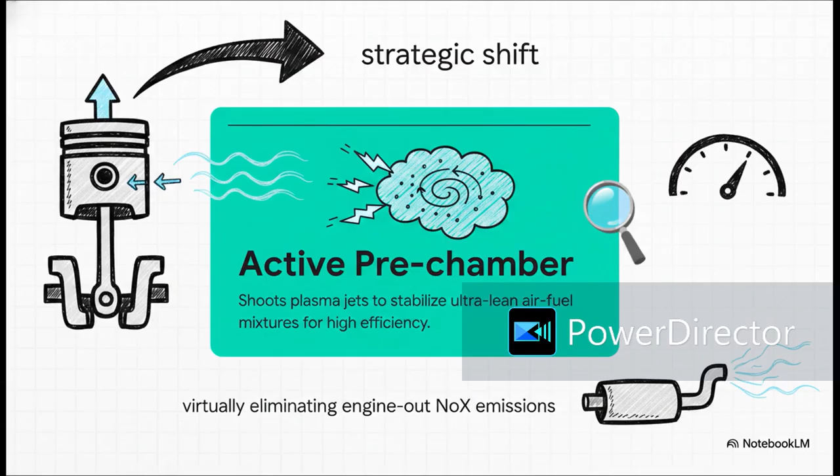Engineers are combining an active pre-chamber to shoot plasma jets into an ultra-lean air-fuel mixture. We're talking about running at a lambda of 2.0 with an aggressively boosted Miller cycle. By doing this, they are breaking through previous physical limits of heat loss. They're getting stable combustion where previously you'd literally just get misfires, dramatically boosting thermal efficiency and virtually eliminating engine-out NOx emissions. It's brilliant.

And the WCX data shows just how diverse this thermodynamic renaissance really is. These aren't one-size-fits-all solutions. They are deeply tailored to specific platforms. We're seeing everything from ultra-lean 2-liter passenger car concepts all the way up to massive machine learning-optimized open bowls for heavy-duty diesels. The engineering toolbox has literally never been this vast.

Tracking these thermodynamic performance metrics is fascinating. We see Tongji University's 2-liter ultra-lean breakthrough yielding over 50% efficiency. There's a hydrogen Carnot opposed piston engine hitting a staggering 58.7% thermal efficiency. But I really want to zoom in on this 11.6-liter heavy-duty gasoline concept from IAV because the commercial implications of this specific architecture are absolutely massive.

So to meet upcoming EPA 2027 regulations, Class 8 heavy-duty diesel engines are going to require incredibly complex, bulky, and wildly expensive after-treatment systems. Think dual-dosing SCRs and massive diesel particulate filters. It's a total capital trap for OEMs. But IAV bypassed this entirely.

By adopting a sky-high 16.3-to-1 geometric compression ratio combined with stoichiometric exhaust gas recirculation, they engineered a heavy-duty engine that actually runs on gasoline. Because it runs at stoichiometry, it can use a simple, cheap, tightly coupled three-way catalyst to control emissions. It completely sidesteps the massive capital costs of diesel aftertreatment.

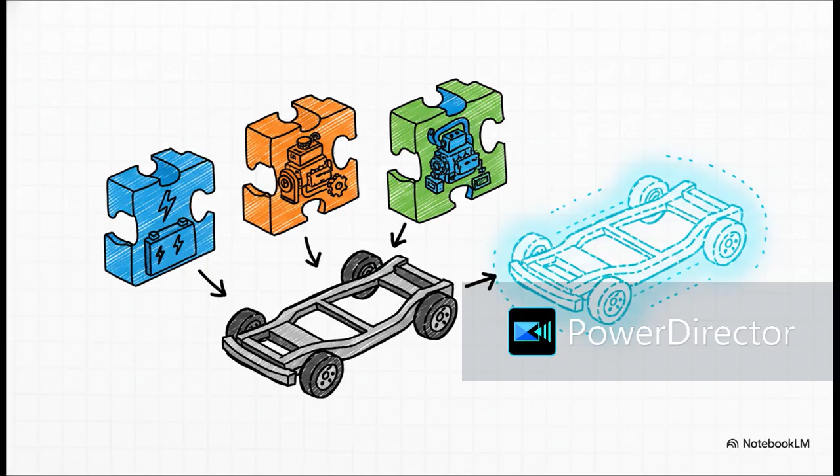You need to master digital twin simulation because managing the thermals and power flow of these multi-energy platforms is incredibly complex. And above all, you have to actively design out geopolitical supply chain vulnerabilities at the elemental level, right there during the initial CAD phase.

Which leaves us with this final strategic imperative to think about. As the internal combustion engine fiercely reclaims its role within a multi-pathway propulsion ecosystem, how will your specific R&D portfolios adapt to secure both strict regulatory compliance and ultimate supply chain resilience? Honestly, it is the defining engineering challenge of the decade.

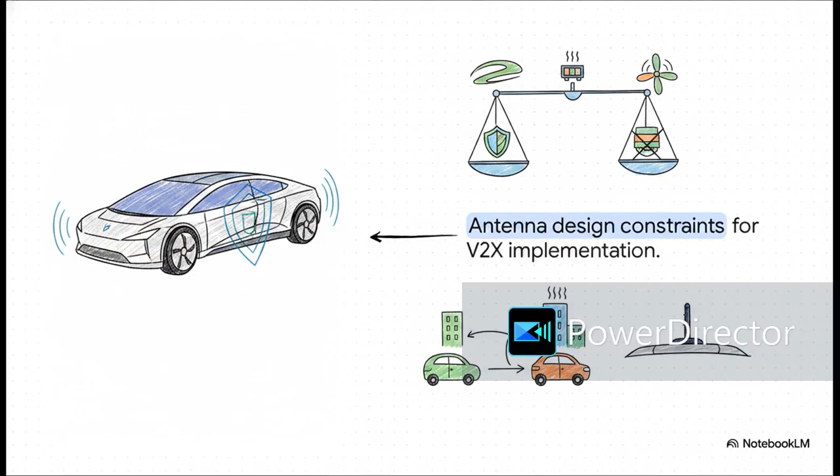All right, shifting gears to pillar 3, bidirectional charging, or V2G and V2X. This is all about energy and macro grid integration. Turning EVs into active mobile grid storage units is a phenomenal concept, but mathematically, it's incredibly daunting. The Flex V2X project showed how to solve this using some really complex Q-learning algorithms.

We aren't just plugging cars in and walking away anymore. This advanced AI dynamically calculates the absolute best charge and discharge cycles, basically turning every parked vehicle into an intelligent energy asset. Let's break that math down a bit.

In V2G, Q-learning calculates the optimal action, so exactly when to charge or discharge and for how long, based on a specific state. That state includes variables like your battery's current state of charge, real-time wholesale grid prices, and even forecasted renewable energy generation. The algorithm maximizes your long-term reward by balancing the macro grid's economic and energy demands against the physical and thermal limits of the vehicle's micro battery pack. It's honestly an exquisite balancing act.

And grounding this high-level theory in hard engineering data, the results are just stunning. These intelligent, Q-learning-driven V2G strategies have actually proven to reduce battery degradation rates by exactly 7.68 per mil, or parts per thousand, when compared to unregulated extreme fast charging. For fleet operators and OEMs sweating over warranty claims and battery longevity, this algorithmic approach isn't just an environmental win, it's a massive margin protector.

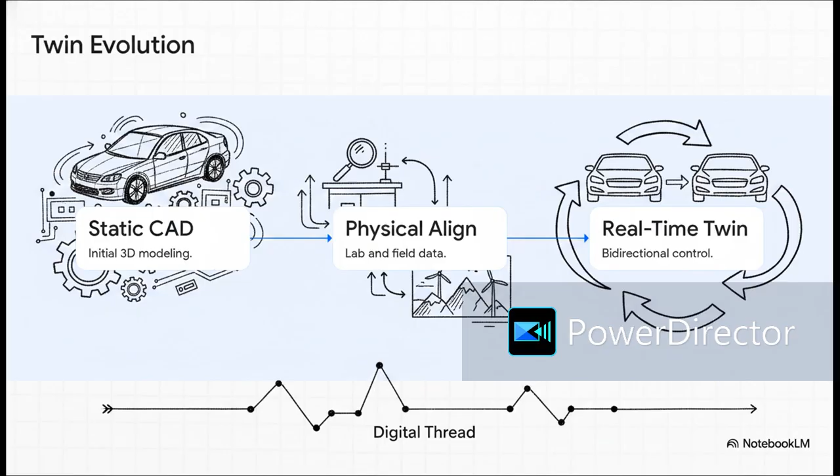And finally, they evolve into full bidirectional real-time control twins that synchronize perfectly with the physical asset in the real world. This creates a continuous digital thread across the entire product lifecycle. We are moving away from reactive maintenance and stepping into true predictive capabilities. But we've got to be super rigorous here. WCX 2026 made it crystal clear.

We are officially entering the era of the physics-informed digital twin. It is no longer enough to just have data-driven machine learning models. Your AI absolutely must align with physical reality. Researchers showed this off with frameworks like AlphaPEM, which gives you spatially resolved fuel cell dynamics. By aligning digital outputs with trusted legacy tools, things like CFD and finite element analysis, engineers can run entirely zero-risk what-if analyses for extreme operating conditions. And you do it without blowing up prototypes that cost millions of dollars.

Next up, part 5, multidisciplinary design optimization. Let's transition to our final technical pillar, which is achieving system-level resolution through MDO. In modern SDV architecture, you're constantly battling conflicting constraints, right? Mass reduction versus crashworthiness, battery packaging versus chassis stiffness. It's a headache. MDO solves this by optimizing all these complex interactions simultaneously.

But I have a rapid-fire question for you. Why does the automotive industry heavily prefer single-level MDO, while the aerospace guys almost always default to multi-level MDO? The answer is pure practicality. Automotive development cycles are brutal. They are incredibly fast. Centralized single-level optimizers minimize all that cross-team coordination overhead and ensure a much faster convergence toward a feasible solution. Aerospace has these highly autonomous design groups stretching their work over decades.

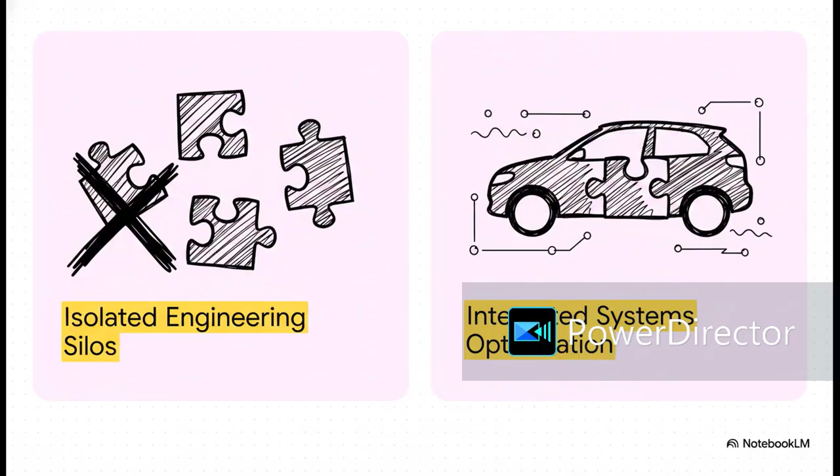Moving right along to Section 2, 3rd-generation AHSS metallurgy. Despite all the buzz around exotic composites, steel remains the absolute backbone of automotive construction, primarily because it's cost-effective and the supply chain is just incredibly mature. And here is the real so what of third-generation advanced high-strength steels. It's all about that stark contrast in elongation.

Traditionally, if you wanted gigapascal-level tensile strength, like the 1500 megapascals in press-hardened boron steel, you had to sacrifice ductility, dropping down to a super brittle 5 to 8% elongation. That meant using highly energy-intensive hot stamping. But third-gen AHSS hits massive tensile strength while holding on to a 15 to 20% elongation. This is a massive game-changer, guys.

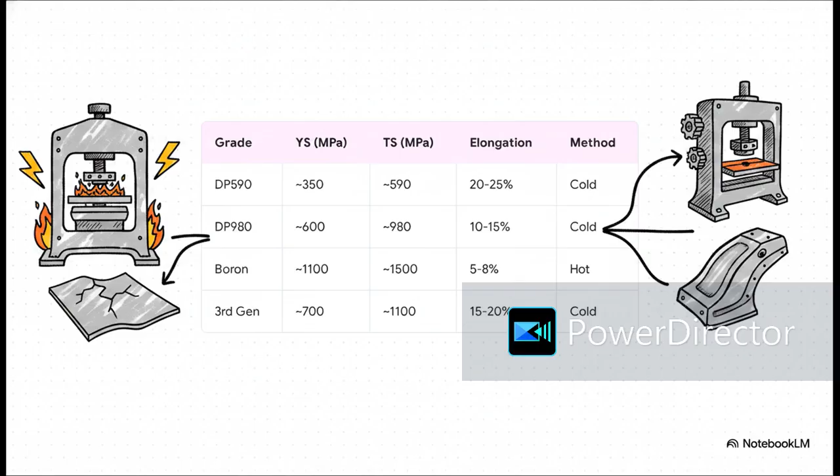It allows for energy-efficient cold stamping of highly complex safety structures, entirely bypassing the huge capital and energy costs of hot stamping facilities. So what's the metallurgical magic making this possible? It's all about microstructural manipulation. Engineers are stabilizing retained austenite at room temperature using tightly controlled quenching and partitioning, or Q&P cycles.

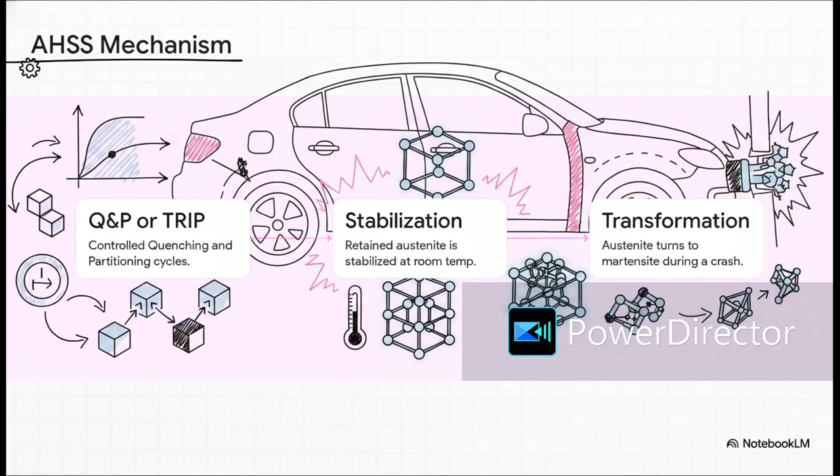When a crash happens and the steel deforms, that austenite physically transforms into martensite. This transformation literally absorbs immense crash energy and gives you a super high strain hardening rate. It's absolutely perfect for critical impact zones, like your B-pillars.

But of course, there's an engineering bottleneck we have to navigate, and that's edge cracking sensitivity. Gigapascal-grade steels have notoriously terrible edge ductility. If you run conventional mechanical punching on these metals, you're going to get a really dismal hole expansion ratio, or

HER, of below 12%. However, WCX data proves that if you leverage advanced edge preparation techniques, specifically laser cutting or electrical discharge machining, you can astonishingly push that HER from 12% to over 100%. Master the edge prep, and you immediately unlock the deep draw geometries that modern styling and safety standards absolutely demand.

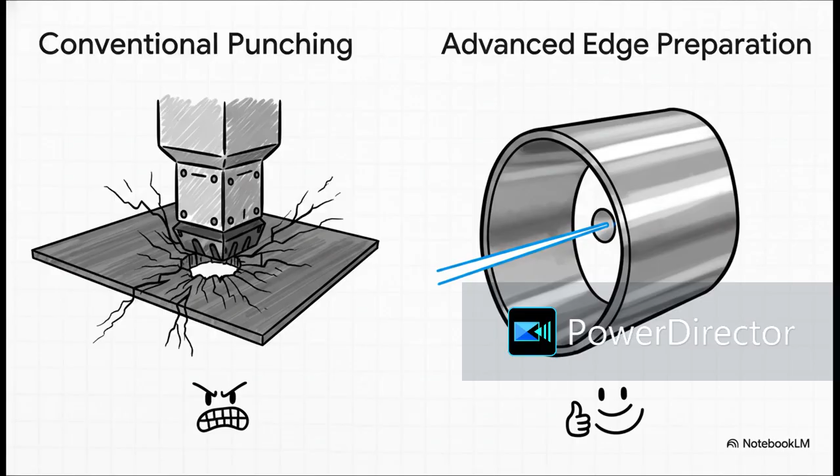Okay, let's pivot to Section 3, gigacasting or megacasting integration. Shifting gears from ferrous to non-ferrous metals, gigacasting is totally rewriting the rules for the body in white. By integrating dozens of individual stamped and welded parts into a single massive aluminum cast structure, OEMs are just slashing their bill of material complexity and really tightening up physical tolerances.

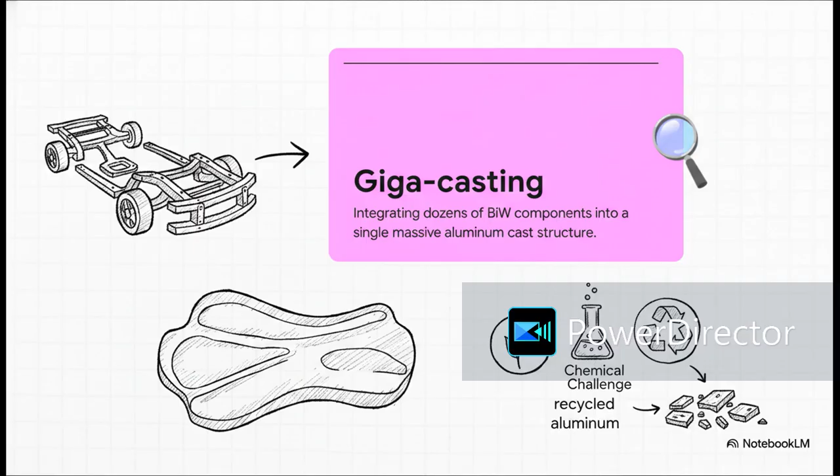But when we try to align this with incredibly strict carbon mandates, a massive chemical challenge pops up: actually using sustainable secondary or recycled aluminum in the mix. As OEMs aggressively push to use low-carbon, recycled aluminum to hit their green targets, iron impurities quickly become public enemy number one. In these massive structural castings, excess iron threatens to completely compromise the ductility of the component, which leads

to catastrophic structural embrittlement. Obviously, you simply cannot have a brittle suspension or subframe casting. It's a non-starter. The metallurgical solution presented at the Congress is actually pretty elegant. It's the precise addition of manganese.

By adding it straight into the recycled aluminum melt, chemists can literally force the iron impurities to change their physical shape. It transforms the brittle, needle-like beta phase iron structures into totally benign, script-like alpha phases. This slick chemical intervention allows the secondary alloy to tolerate up to 0.44 weight% iron without suffering any structural failure whatsoever, finally unlocking true circularity in gigacasting.

Moving to Section 4, cell-to-chassis architecture. Building on this whole concept of large-scale integration, we are effectively looking at the death of the traditional battery module. Cell-to-chassis or cell-to-body architecture represents the ultimate structural convergence. We are completely eliminating the dead weight of intermediate module housings and forcing the battery enclosure itself to step up and act as the primary load-bearing floor pan of the vehicle.

Now, the crucial takeaway here is that this is not just about saving space. Yes, for sure, it maximizes gravimetric and volumetric energy density, but fusing a high-density battery array directly into the body in white drastically shoots up the overall chassis torsional rigidity. That means better handling dynamics and seriously enhanced noise, vibration, and harshness metrics.

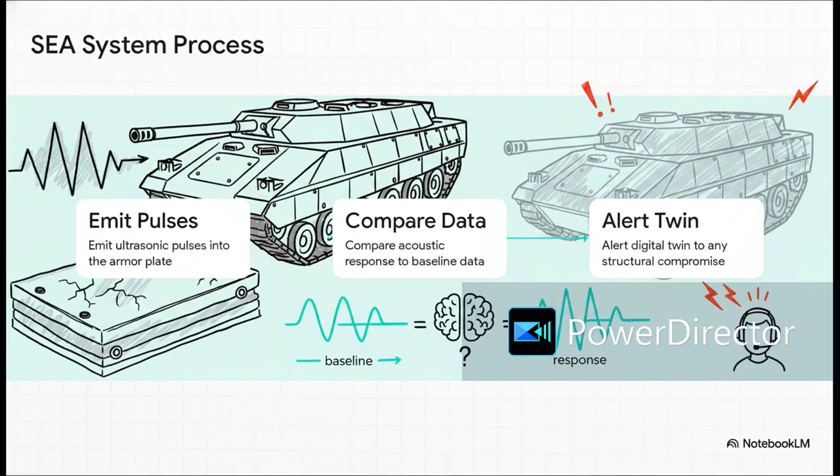But here's a crazy question. How do you actually know if this advanced, lightweight aluminum armor is still protecting you after taking a direct hit? The answer is Sensor-Enhanced Armor, or SEA, and this is just wild engineering. The integrated system constantly emits ultrasonic pulses directly into the solid armor plate. It then takes that acoustic response and compares it back to a mathematically perfect baseline. If there are any microcracks, deep delaminations, or structural compromises, it instantly alerts the vehicle's digital twin and the human operators. You guys, it is literally armor that can self-diagnose battle damage in real time.

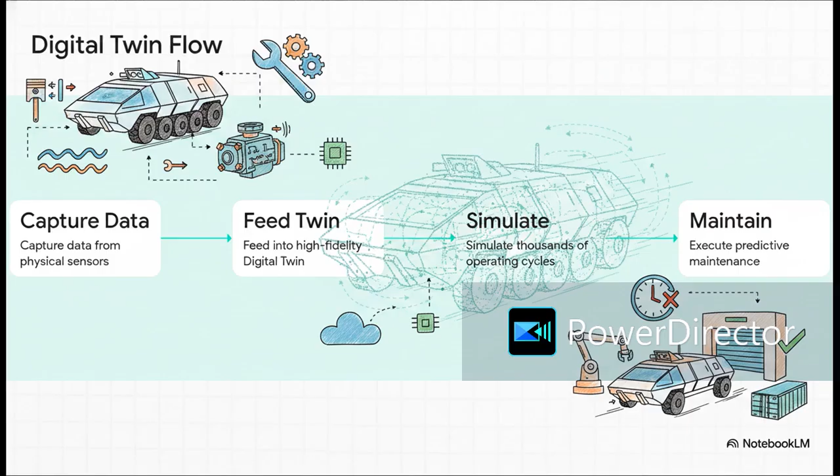By feeding real-world physical sensor data straight into a high-fidelity digital twin, the overarching system can simulate thousands of operating cycles in seconds. It accurately predicts when a critical component is going to fail long before it actually does. This strictly optimizes global supply chains and ensures these highly complex vehicles are actually ready for rapid deployment when it counts.

So, I'm going to leave you with this final, somewhat provocative thought. The developments showcased at the 2026 SAE WCX clearly prove that the military is actively pivoting to open software standards, live digital twins, and dual-use thermodynamics just to survive. They are systematically adopting commercial engineering practices to achieve absolute tactical dominance. So looking at your own commercial projects, are your future mobility architectures engineered to be just as resilient against the multi-domain threats of tomorrow?

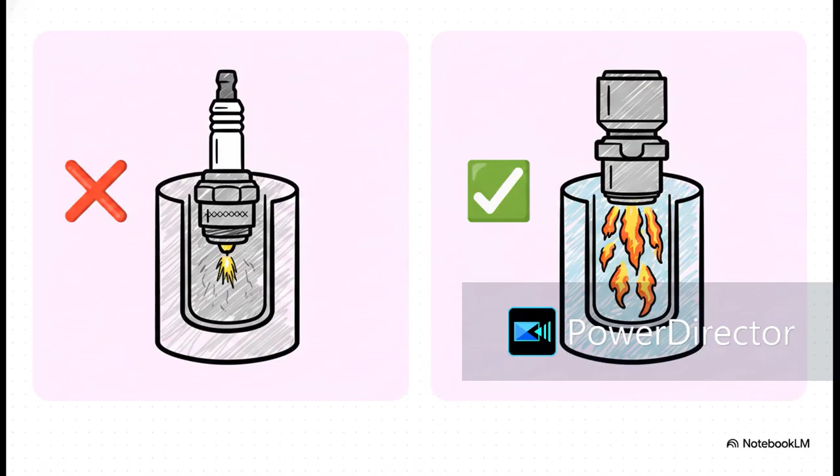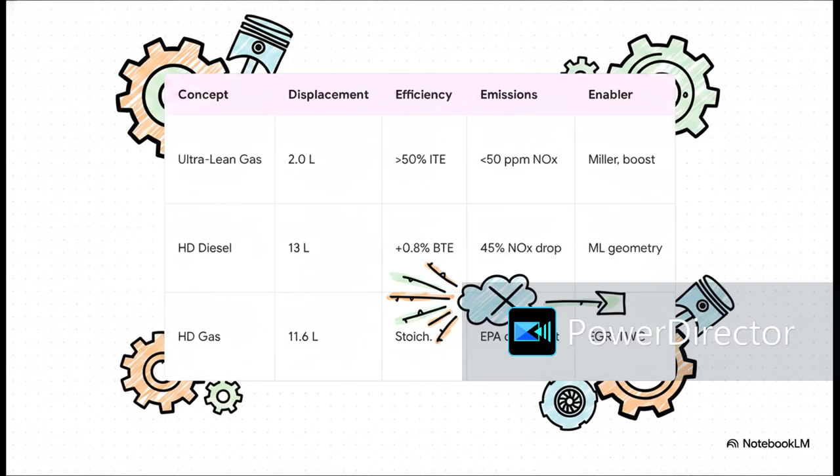Next up, Section 3, Aerodynamic Wake Rule Optimization, focusing on fluid dynamics and efficiency. So how do we master these new FIA constraints? Notice the extremely strict geometrical limits we're dealing with. Regulators are forcing a minimal convex curvature of 25 millimeters on base plates specifically to suppress those powerful, dirty air-generating vortices. And simultaneously, under massive aerodynamic loads, the floor plate is legally capped at a maximum deflection of just 8 millimeters. You are boxed into this microscopic window of structural flexibility.

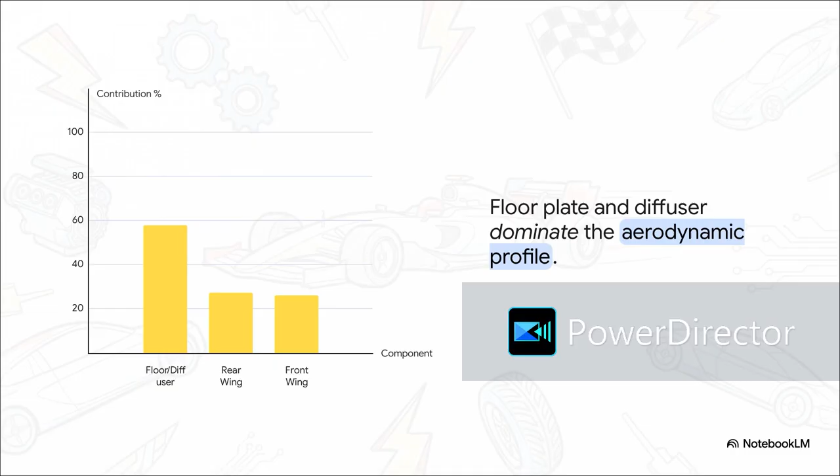And why does an 8 millimeter deflection limit matter so much? Because when we map out the downforce generation for the 2026 vehicle, the floor plate and diffuser absolutely dominate. They're responsible for a staggering 58% of total downforce. Ground effect is literally everything right now. Underbody airflow management is the definitive battleground, which means keeping that floor geometrically stable at 300 kilometers per hour is your priority number one.

Since the macro geometry is so tightly locked down by regulations, the real competitive advantage has shifted to microaerodynamics. For instance, WCX papers show that installing microspoilers, just 5 millimeters tall, on the sides of the tires cuts wake interference by 15%. That 15% reduction, that's the difference between a totally stalled underbody and a perfectly stable downforce platform when you're hitting high-speed corners.

To process wake structures this complex, traditional CFD is just hitting a wall. Standard Navier-Stokes RANS models? Too inaccurate for massive flow separation. Pure large eddy simulation? Computationally bankrupting. So instead, teams are migrating to wall-modeled large eddy simulation, WMLES, accelerated by massive GPU clusters. On top of that, they're deploying NVIDIA DoMINO AI surrogate models. This predicts aerodynamic drag and lift in milliseconds instead of days. For all intents and purposes, AI is the new wind tunnel.

Moving on to Section 4, Advanced Manufacturing Prototypes and Structural Realization. Once your AI designs the perfect aerogeometry, how do you actually physically build it to survive those brutal 8mm deflection limits? The workflow has evolved into a hyper-fast, closed-loop process. Step 1. AI simulation dictates the topology. Step 2. Move straight into advanced additive manufacturing, totally bypassing traditional tooling. Step 3.

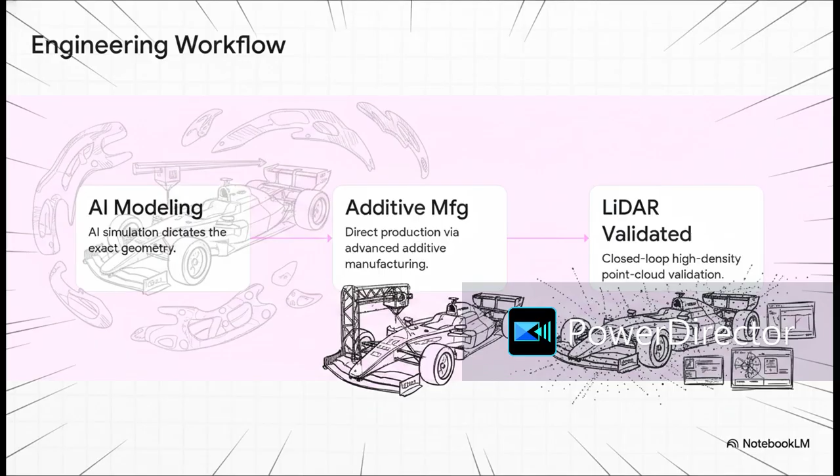Close the loop with high-density LiDAR point cloud validation. Forget old photogrammetry. Real-time LiDAR lets engineers perfectly map the dynamic, physical flexing of carbon fiber right back into their CFD software. Executing this physically relies 100% on next-generation material science. To meet those FIA floor stiffness rules, teams are using aerospace-grade titanium AMS 4928 for floor stays and pairing that with ultra-rigid 2mm carbon fiber reinforcements.

But it goes beyond composites. We're now seeing the direct 3D printing of structural components with built-in thermal management microchannels. You are literally printing the radiator directly into the chassis. It's wild. Finally, Section 5, the 2030 Engineering Trajectory, bringing it all together with systemic integration.

So, how does all this extreme track data actually impact the global commercial market? If we look down the macro timeline, the tech transfer is immediate. By 2027, that ultra-lean hydrogen combustion and active pre-chamber tech we just talked about, that's going straight to heavy-duty commercial fleets, trucks that simply can't afford massive battery weight. By 2028, those AI proxy models will drive consumer software-defined vehicles, enabling real-time chassis updates over the air.

And by 2030, the integration of 450 watt-hour per kilogram solid-state batteries is going to power autonomous swarm racing. That will completely redefine machine perception and vehicle dynamics as we know it. Which leaves us with this final, somewhat provocative thought. We're stepping into an era of absolutely merciless engineering optimization. The math is exact, the regulations are suffocating, and the AI is relentless.

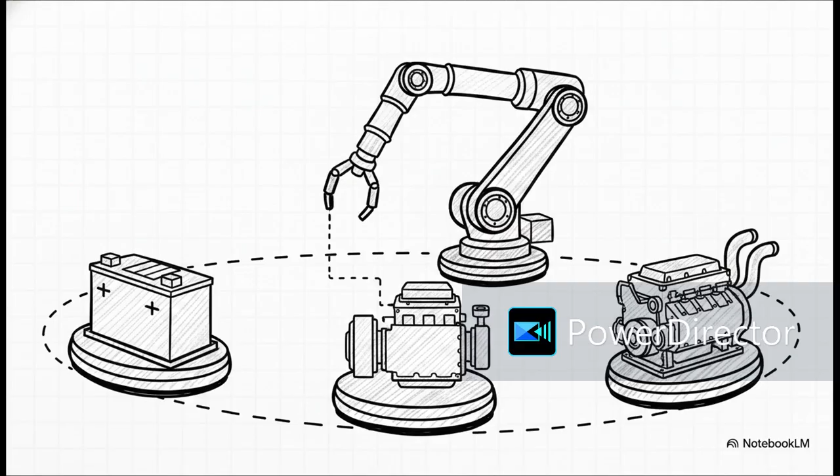Let's move to the muscle of the operation, flexible powertrain assembly lines. Now we get into the physical execution. The reality coming out of WCX 2026 is a massive, and I mean massive, resurgence in hybrid and advanced internal combustion engine technologies. And navigating this volatile multi-pathway propulsion landscape demands incredible agility. By utilizing advanced autonomous mobile robots, your factories have to seamlessly pivot. One minute you're assembling battery electric models, the next it's complex hybrid systems wedding motors to engines, and then it's next-generation ICE platforms, all happening dynamically on the exact same line.

To really grasp the sheer physical challenge this presents, just think about this metric: pushing past 50% indicated thermal efficiency. Achieving this massive breakthrough via ultra-lean combustion, say at a lambda of 2.0, means your factory machining tolerances for cylinder temperatures and fuel delivery have to be pushed to absolute microscopic limits. It's an incredible engineering feat for sure, but it means your flexible machining centers must handle this extreme ICE precision one moment and then completely switch gears to milling structural EV battery enclosures the next.

Which brings us to our final section, the 2026 Manufacturing Strategic Outlook. So, pulling this all together, synthesizing these pillars, the organizations that are going to dominate the remainder of this decade share a few core traits. They've unified that digital backbone, connecting design and production. They've adopted edge-first intelligence for low-latency quality assurance. They are operationalizing sustainability through integrated lifecycle assessments directly on the line. And they have fully embraced extreme manufacturing agility.

The takeaway here? Engineering teams have got to stop viewing the factory floor as just a static cost center. It is an integrated, software-defined testing ground that is absolutely crucial for protecting your architectural sovereignty against macroeconomic volatility. And that brings us to the ultimate question you need to be asking your engineering teams as you architect your strategy. Is your production ecosystem actually agile enough to survive the multi-pathway propulsion era? Do you have the digital continuity and edge intelligence required to lead, or are you still relying on rigid legacy architectures? The blueprint for success is already being written.

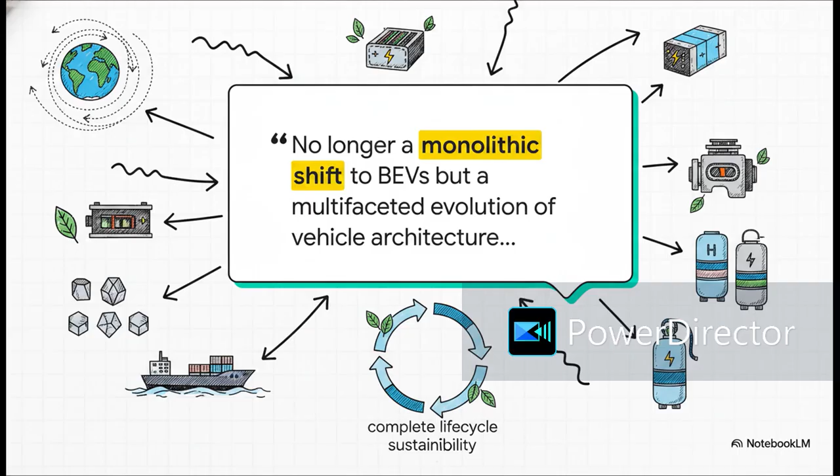Okay, let's dive into the details. This quote right here from the SAE proceedings absolutely nails the massive pivot we're witnessing. For the professional automotive engineers tuning in, you already know that geopolitical realities, specifically the supply chain vulnerabilities surrounding critical battery minerals, have basically forced a total recalibration. We just aren't optimizing for end-of-pipe, tailpipe emissions anymore. The new engineering mandate is complete lifecycle sustainability. It's a fundamental structural realignment, and it's being driven equally by applied physics and global macroeconomic realities.

So, to digest the hundreds of technical papers from WCX 2026, we're going to use a strict top-down MECE framework that's mutually exclusive, collectively exhaustive. Our agenda focuses on three core pillars. First, the operating environment and regulatory compliance. Second, we'll move upstream to LCA automation. And finally, we'll tackle the downstream circular battery economy.

Let's jump straight into Pillar 1, the operating environment, and specifically how we navigate fragmented global regulatory compliance. The strategic takeaway answer first is this. As mobility engineers, you now have to navigate a totally fractured, hyper-regionalized policy map. You just can't design a single static global platform anymore. Winning in this decade demands highly modular hardware architectures that can adapt to wildly different regional constraints.

For instance, in the US, the EPA has actually provided some crucial breathing room by delaying light-duty Tier 4 standards and relaxing CAFE expectations, acknowledging that these shouldn't be weaponized to force pure electrification. But then you look at California, and CARB is aggressively pushing Tier 5 draft standards for non-road engines, demanding ultra-low NOx through tech like cylinder deactivation. Meanwhile, over in Europe, the EU introduced a 3-year average emission evaluation for 2025 to 2027 to give OEMs some flexibility, but their Euro 7 mandates are going to require really intense onboard monitoring. So you've got 3 regions requiring 3 completely different engineering responses.

Translating all that policy into actual hardware means we need highly specific emission control solutions. For Euro 7 and EPA 2027, engineers are heavily leaning into selective catalytic reduction on filter, or SCRF. This is absolutely crucial because it combines NOx reduction and particulate filtration into a single substrate, saving precious packaging volume. And for heavy-duty compliance, we're seeing the sheer necessity of AMOX, ammonia oxidation catalysts, to strictly control ammonia slip during transient operations. You know the drill. Every single millimeter of packaging space is literally a battleground right now.

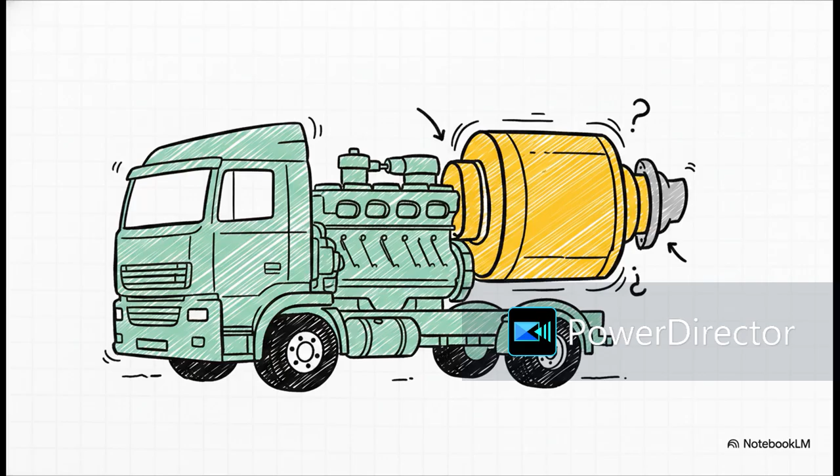Let's geek out for a second on how they actually hit that 43.1%. The IAV 11.6-liter architecture uses a staggering 16-to-1 geometric compression ratio, and they pair that with extreme Miller cycle intake valve timing to prevent knock while maximizing the expansion ratio. It also utilizes stoichiometric EGR to keep a massive 40-liter single-unit 3-way catalyst fed and perfectly happy.

So what's the so what here for Tier 1 suppliers? Well, if you want to achieve EPA 2027 compliance using this really economical gasoline architecture, your global vehicle platforms have to be modular enough to package a 40-liter catalyst. That is a massive packaging constraint that completely alters the entire chassis layout.

Moving upstream, we arrive at Pillar 2, upstream engineering, focusing heavily on life cycle assessment, or LCA, automation. We are witnessing a profound philosophical shift in the industry.

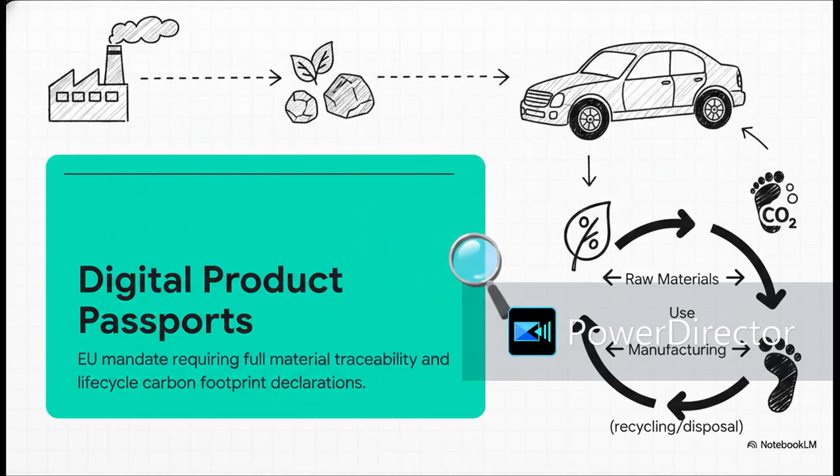Environmental impact evaluation has officially moved from the end-of-pipe, tailpipe phase straight into the embryonic CAD design phase. This shift is being heavily driven by digital product passports, or DPPs, an upcoming European mandate that demands absolute, undeniable transparency. OEMs are going to need comprehensive material traceability and full cradle-to-grave carbon footprint declarations. DPPs represent a forced evolution. Those old-school manual post-design LCA calculations, where you find out your component failed its carbon budget right before production, those are officially financially and legally obsolete.

When you start comparing LCA metrics for different materials, everything from fossil-based plastics to renewables to mechanically recycled composites, the trade-offs between cradle-to-gate CO2, water usage, and energy consumption become incredibly complex. It's like a giant puzzle. And since lightweighting is still the primary enabler for EV range extension, using these automated LCA tools is really the only mathematical way to ensure your new composite materials actually hit strict ESG targets without accidentally causing massive upstream damage.

Now, let's shift downstream to Pillar 3, downstream management and the circular battery economy. As the auto industry scales up to produce tens of millions of electric vehicles, managing the millions of tons of highly complex electrochemical waste is basically our absolute defining challenge of the late 2020s. And the debate over end-of-life management has really crystallized into 2 diverging paths. On one side, you have second life reuse, taking degraded EV batteries and repurposing them for stationary grid storage. Now, this extends physical life, but it strategically strands critical minerals like lithium and cobalt for decades.

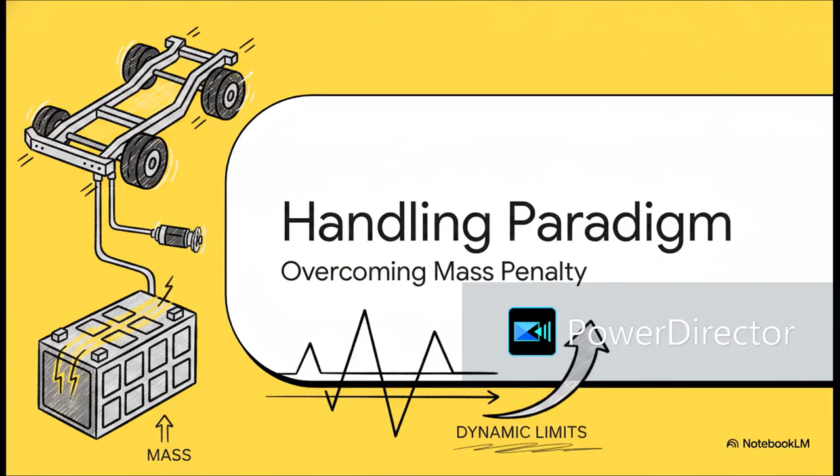Section 1. The new handling paradigm, and how we actually overcome the SDV mass penalty. All right, so here's the reality check. The transition to heavy, electrified, software-defined vehicles has completely shattered our traditional chassis engineering rules. We're suddenly dealing with these massive, high-voltage battery packs that slap hundreds of kilograms of sprung mass onto the chassis. That radically alters both the overall mass and the yaw moment of inertia.

Because of this, we literally have to throw out those legacy linear bicycle models we've relied on for decades. Instead, modern chassis control forces us into complex, multi-body state space representations. In these new mathematical models, parameters aren't just static constants anymore. They're time-varying variables dictating lateral response. Mastering this state space formulation, it's no longer optional, it's the absolute baseline for modern handling.

Which brings us to Section 2, DRL-based torque vectoring, or the control logic layer. So to manage all these incredibly complex lateral and longitudinal dynamics we just talked about, we have to look at the evolution of torque vectoring. Now, pay attention to the shift in computational strategy here. Historically, we engineers leaned hard on nonlinear model predictive control, NMPC. Great fidelity, sure, but it requires massive, power-hungry processing to constantly calculate future constraints.

Well, the WCX 2026 proceedings highlight a massive pivot away from that, moving straight toward actor-critic deep reinforcement learning, or DRL. Why? Because it delivers that same high-fidelity handling for highly nonlinear tire models, but with radically lower computational requirements at the edge. It is, frankly, a total game-changer for onboard real-time processing.

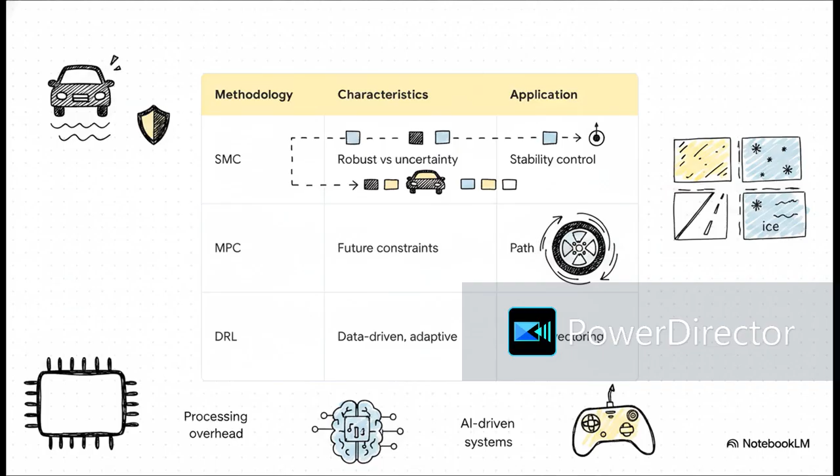Comparing these dominant control methodologies side by side really tells the story. Sliding mode control, SMC, is still super robust for basic stability, right? And MPC is great for high-precision path tracking. But DRL? DRL is the absolute emerging champion for torque vectoring. Because it's trained offline on high-fidelity multi-body simulations, these DRL-based controllers completely outperform conventional methods across rapidly changing road frictions. Imagine hitting a sudden patch of black ice. DRL handles it smoothly, without maxing out the vehicle's processing overhead. It's incredibly efficient.

Okay, so how does this actually look in the vehicle? It relies on a multi-layer framework. First up, you have an adaptive high-level controller, typically an ALQR, which shapes the desired yaw response based on what the driver is doing. Then, right beneath that, a low-level allocation layer uses quadratic programming to solve the exact torque distribution across the individual motors, and it does this in mere milliseconds.

But here is the really surprising takeaway. This setup doesn't just give you extreme agility. By managing tire slip this precisely, it actually yields up to a 10% energy savings in specific drive cycles. You are literally converting better handling into longer electrical range. How cool is that?

Moving on to Section 3, Smart Corners in-wheel propulsion, focusing on hardware integration. All right, translating all this software into physical packaging ushers in the era of the smart e-corner. This is a highly modular system that consolidates propulsion via in-wheel motors, steer-by-wire functionality, seamless brake blending, and active suspension, all tucked entirely within the wheel envelope.

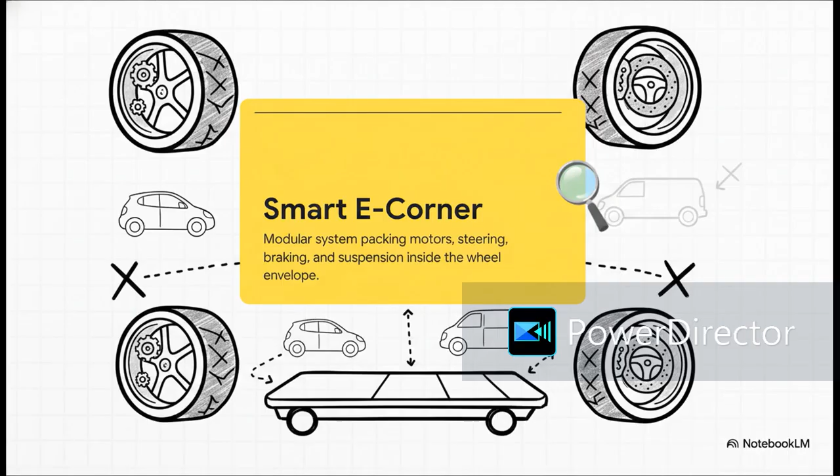Think about what that means. By pushing all that dynamic hardware to the four corners, you completely liberate the central floor pan. No central traction motor, no differential, no half shafts. This unlocks true skateboard chassis modularity. An OEM can essentially scale from a compact city car right up to a commercial van on the exact same base platform.

Now, I know what you're thinking. Any seasoned chassis engineer watching this immediately zeroes in on the elephant in the room, the unsprung mass penalty. For years, the industry vehemently rejected in-wheel motors because slapping all that mass directly onto the hub destroys ride quality and messes with tire contact patch consistency.

But here is where it gets fascinating. The Smart Corners initiative actually negates this physical limitation through advanced software. By coordinating ultra-fast active suspension actuators via high-speed deterministic AI networks, the system proactively manages those wheel dynamics in real time. It effectively masks the physical weight penalty, proving that, yes, algorithmic control can indeed overcome legacy hardware limitations.

And that leads us perfectly into Section 4, Active Suspension Kinematics, or Mastering Vertical Dynamics. Keeping heavy SDV sensor platforms perfectly stable requires managing some severe vertical dynamics, and that takes a brilliant division of labor.

Traditional suspensions always force a compromise between comfort and handling. But the WCX 2026 solution is a hybrid suspension architecture. It uses continuous hydraulic dampers to handle the heavy lifting, high-force, low-frequency movements, like resisting body roll in a tight corner. But simultaneously, you have these hyper-fast electromechanical actuators punching out high-frequency, low-amplitude disturbances. Think bridge expansion joints or a nasty stretch of cobblestones.

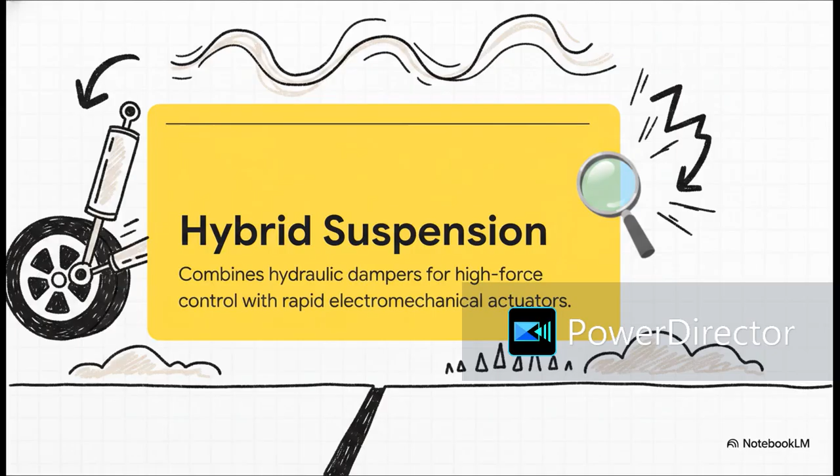But to actually govern this sophisticated hardware, classical skyhook theory is getting a massive upgrade. Engineers are now implementing fuzzy neural network PID controls, or FNN PID, to instantly process huge data streams from inertial measurement units and wheel speed sensors. This algorithm dynamically tweaks those hybrid actuators in milliseconds. The goal here is basically the perfect mathematical ideal, completely isolating the sprung mass from chaotic road inputs. It's almost like the chassis is floating.

Finally, Section 5, Strategic Engineering Takeaways, where we synthesize this entire 2026 paradigm. When we synthesize all these domains, one massive overarching theme emerges: systemic integration. The days of engineering subsystems in silos are completely over. Your DRL software, your smart corner hardware, and your active suspension kinematics absolutely must be strictly co-developed.

To succeed in this era, you have to master extreme platform modularity. And all of this has to be linked by a unified digital backbone, which means relying heavily on zone-based EE architectures and centralized compute platforms to drastically kill latency.

So I want to leave you with a critical question regarding your organization's technological sovereignty. Is your OEM or your Tier 1 supplier's centralized compute architecture truly prepared to govern the incredibly complex real-time interplay of AI algorithms, smart in-wheel hardware, and active kinematics that will totally define the market by 2026? Because honestly, if you're still engineering isolated components rather than optimizing whole ecosystems, you are already falling behind.